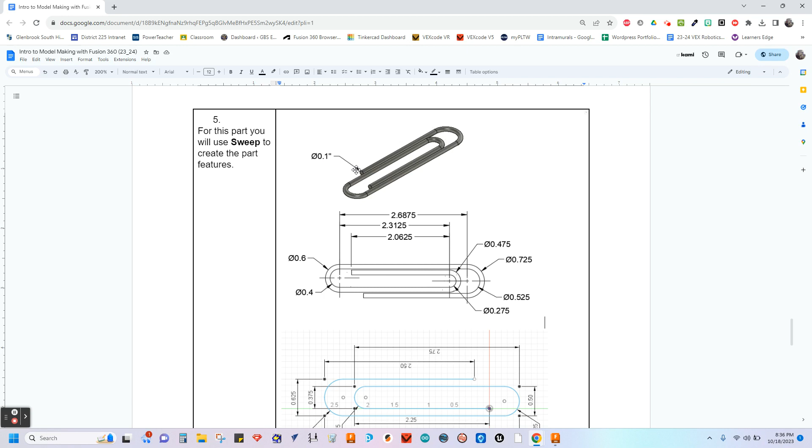For that, we're going to create a paper clip, and it's going to have a 0.1 diameter thickness to it, and then we're going to run this path that you see here. This is typically how you would see it dimensioned on a drawing sheet. However, I did give you now a screenshot of what that sketch would look like in sketch view when creating it in Fusion.

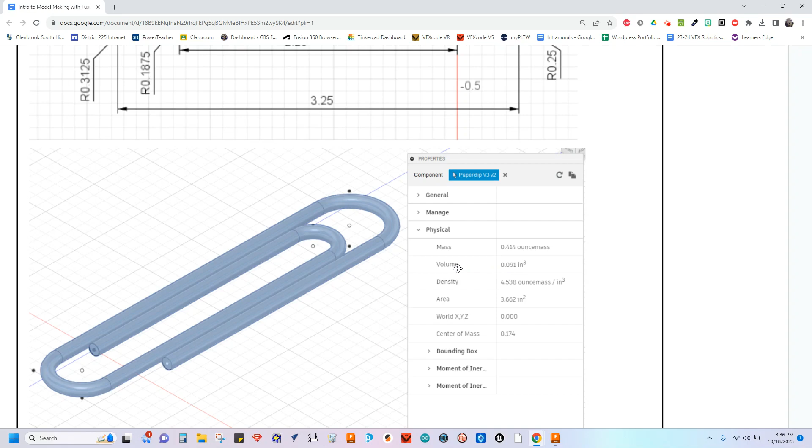And then for our numbers on this one, for the volume, we're going to be looking to hit 0.091, and for the area 3.662. So if we go ahead and take a look at Fusion, I have the completed part here. As you can see in the timeline, it's just two sketches and then the sweep feature itself.

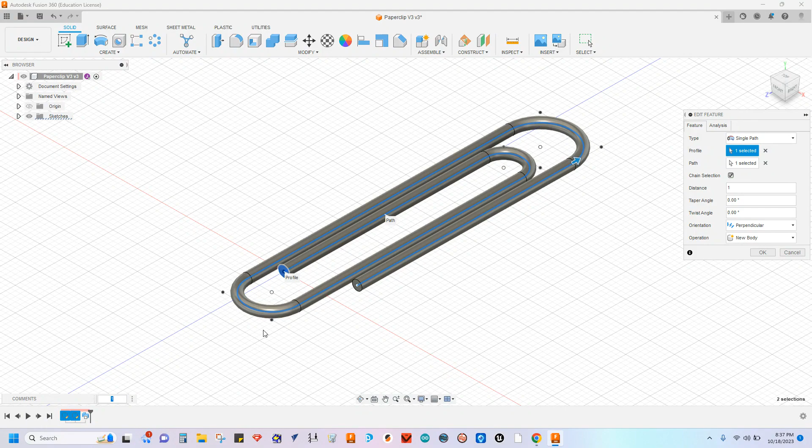To show you the sweep feature, it's just a matter of selecting the profile as the 0.1 inch diameter circle that we're going to create. And then for the path, it'll be the course of the path that we create to project that geometry. Now, if I jog this back and we just look at the very first sketch, this is what that looks like.

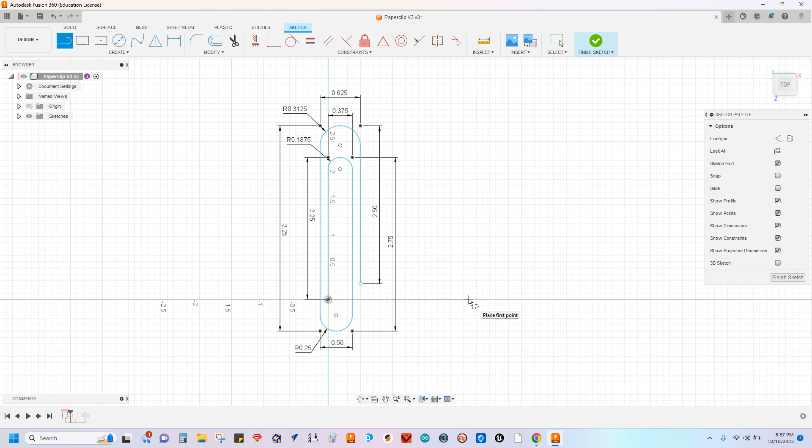To make this as easy as possible, you're going to want to start your sketch right here on the origin. I'm going to use the line tool and retrace this off to the side over here and basically just recreate another profile. We're going to start with a click on the origin, and then we're going to go up. If you follow the dimensions that I've laid out for you, it'll be 2.25 inches. So going straight up 2.25 inches, hit enter.

From there, we're going to gap over to the right at 0.375. So 0.375, enter. Line again. This time around, we're going to bring it down and go 2.75. Line, continue to the left at 0.5. Again, another line, this time going back up, and that'll be at 3.25.

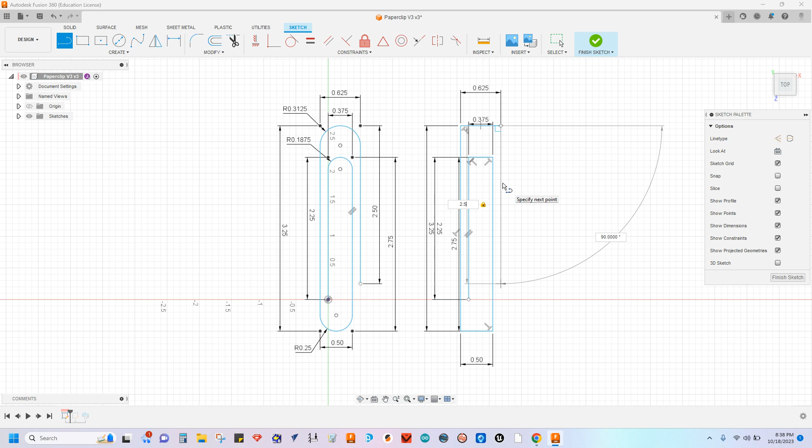Line again from here to the right at 0.625. And then lastly, one line coming back down at 2.5. So that'll create this squared in profile. To give it that rounded look and appeal, we're going to use the fillet tool, but this time in sketch mode. So grab from the modify panel the fillet tool, and starting on the inside here, we're going to set that radius to

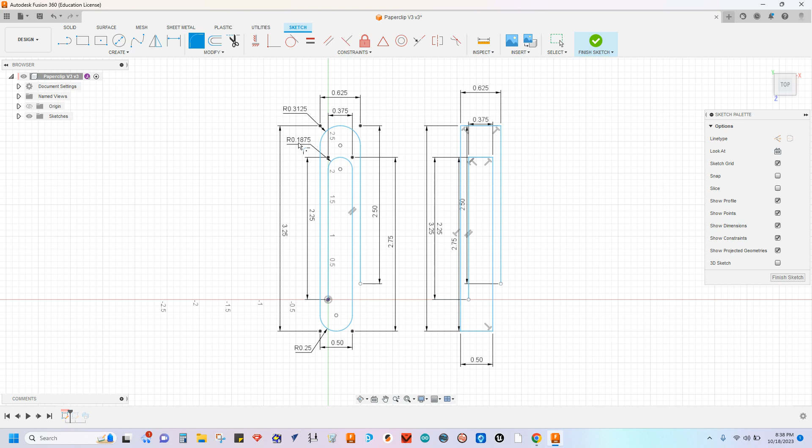0.1875. I'm just going to zoom in and show you: if you click on two lines that are perpendicular to each other, you can create the fillet and then edit that value. Again, that's going to be 0.1875. I'll then continue and click again on the next two corners. It's the same number. And then I'm just going to hit enter to solidify that.

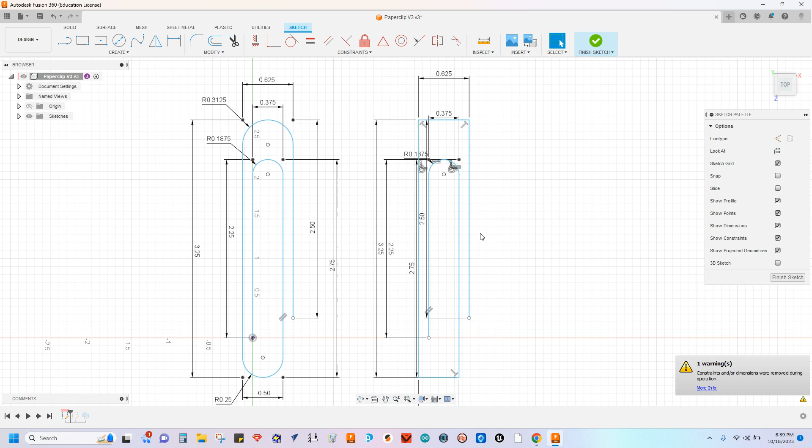Down here on the bottom, we'll have a different radius. It'll be 1/4 of an inch. So fillet. Select these two lines, 0.25. Select these two lines and hit enter.

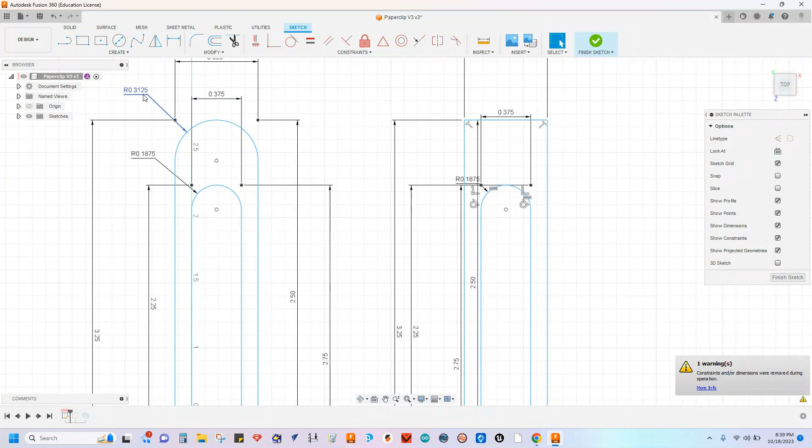And then up here at the top, the next radius will be 0.3125. So fillet these two corners, 0.3125, and the next two corners. Same number, hit enter. Now that's all curved in, you can say finish sketch. Turn the visibility for my sketch back on so we can see that.

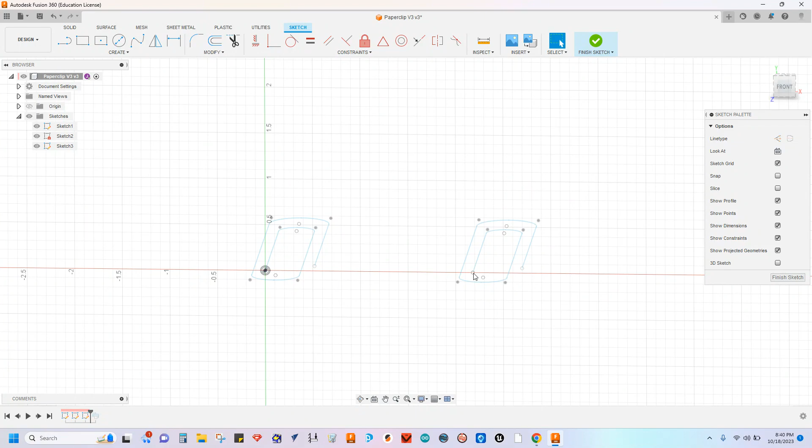I'll now expand my timeline to include this sketch, which was the circle that we needed right here. I'm going to add another one and create a sketch on the same plane. So we're going to be selecting this plane to create that sketch. I'm going to make sure I put this in the right location. I want to drop a 0.1 diameter circle right there.

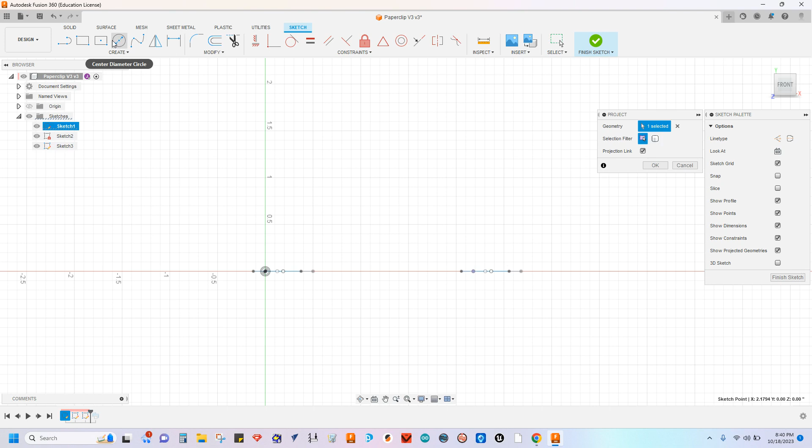If you're noticing this, it won't let me actually snap in on that point. So there's a trick that we can use called project geometry. I'm going to go to project, and now I can click that point. It'll now give me something to reference. So let's do this again. Now you can see it'll actually click on that point. So I'm going to create that and set my diameter on this one with the dimension tool to 0.1. Finish sketch. Now I have two exact replicas of this.

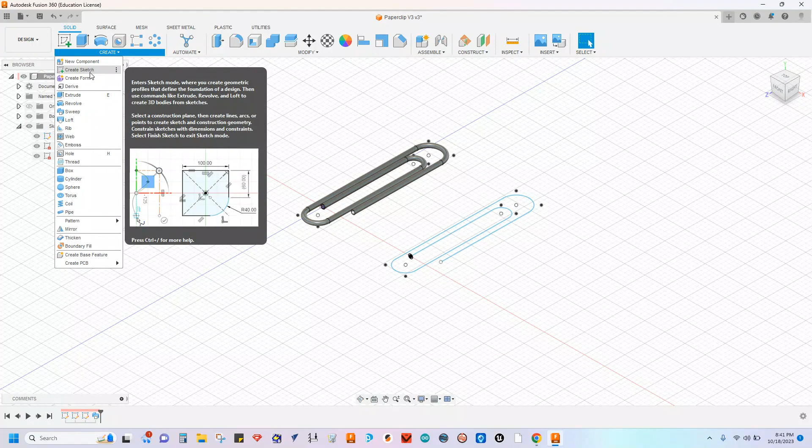If I expand my sweep for this one, you can see it comes back onto the screen. Let me try and do another sweep with the sketch that I just created. So sweep. For the profile, select the circle. For the path, select our path. There it is. We'll say OK. And so that's how you create a paperclip using just two sketches and the sweep feature.

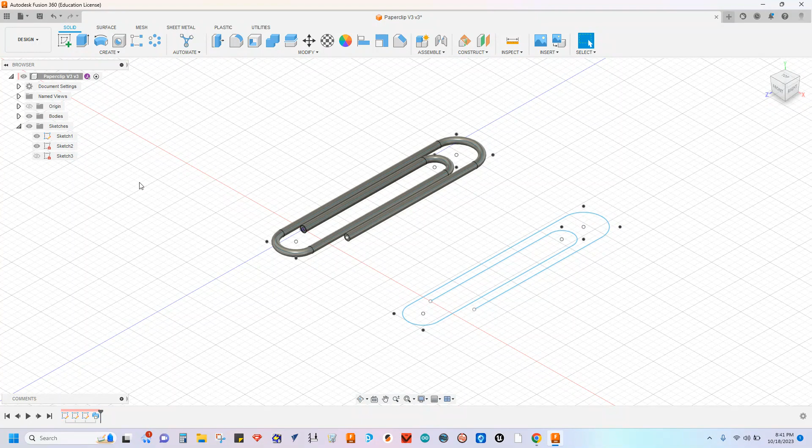If I delete this for just a moment, we check to make sure those properties are correct. Again, the numbers that you're looking for are volume of 0.091 and an area of 3.662. If you have those numbers correct, you can go ahead and save this file, model making part number 5.